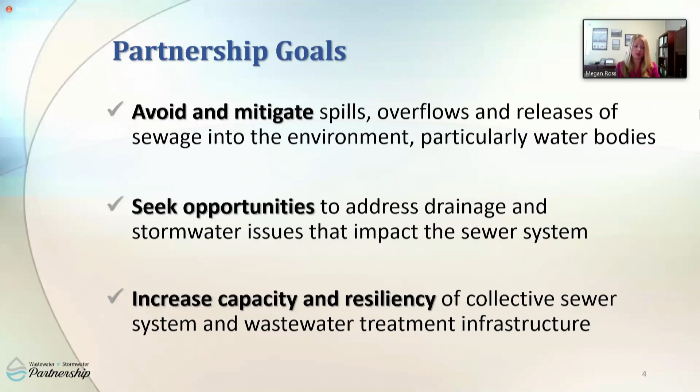To review, the Wastewater Stormwater Partnership identified and agreed upon 3 primary goals that needed to be addressed, as noted by Commissioner Justice: to avoid and mitigate spills, overflows, and releases of sewage into the environment, particularly ones that affect water bodies, to seek opportunities to address drainage and stormwater issues that have an impact on the sewer system, and to increase capacity and resiliency of the collective sewer system and wastewater treatment infrastructure.

Pinellas County is home to 24 different municipalities which serve hundreds of thousands of residents and millions of visitors every year. 17 of those municipalities own or operate wastewater and stormwater systems. Additionally, there are 13 wastewater treatment facilities. These municipalities make up our wastewater stormwater partnership. The purpose of this partnership is to coordinate and collaborate on ways which we can reduce sanitary sewer overflow events.

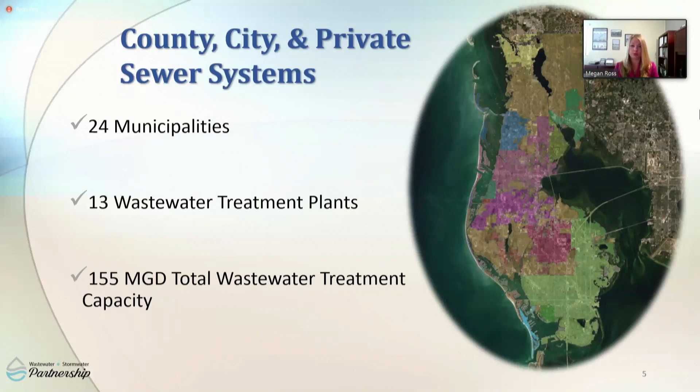As you all know, this has been an eventful and challenging year so far. Throughout the COVID-19 pandemic, our wastewater and stormwater professionals have continued to deliver critical services to our communities under modified protocols. I can assure you that although the current pandemic has provided for operational challenges, it has only served to further our commitment to this community. Our role has never been clearer. We are critical infrastructure essential workers, and water resources provide for the quality of life that we rely upon.

Throughout the past several months, our teams have been breaking ground on new projects. Now more than ever, we need to focus on water and wastewater infrastructure as it is vital to protecting public health. Water resources are integral to so many facets of our everyday lives. Behind the scenes of the beautiful beaches, waterways, hospitals, and emergency services that comprise this wonderful county lies a plethora of infrastructure that supports and maintains the vibrance of our region. As water resource professionals, supporting this infrastructure is our job and our mission.

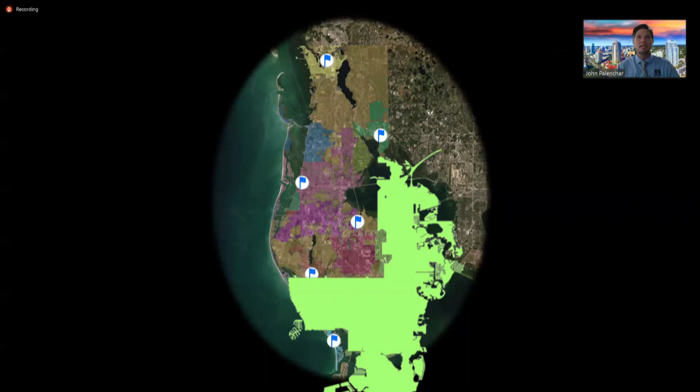So the private lateral is the portion of the pipe that connects a structure's plumbing to the sanitary sewer system, the publicly owned portion. It's commonly known that stormwater and groundwater getting into the sanitary sewer causes a burden on the sewer system and our wastewater treatment plants.

Abnormally extreme inflow and infiltration can result in sewer system overflows or inadequate treatment at the plants, resulting in releases of raw or partially treated wastewater into the environment. However, even during manageable events, this inflow and infiltration places an increased burden on utilities. It makes operating the system more challenging and increases the operations and maintenance costs.

Imagine having to buy and maintain a car that you drive every day to work, but a couple days out of the year, it has to drive the Firestone Grand Prix of St. Petersburg. However, the race is unscheduled, the course is different every race, and by the way, there's a viral pandemic occurring. That would be an expensive car, and it would require a lot of maintenance every day so that it could be ready to race at the drop of a hat. So, as you can see, reducing that I&I has a potential for wide-ranging benefits.

If we look at a Water Environment Research Foundation study, a reported range of private sector inflow and infiltration contributions range from 7% to 80% with an average of 40%. This is based on a survey of 26 utilities across the United States. 7 to 80%, that's quite a range.

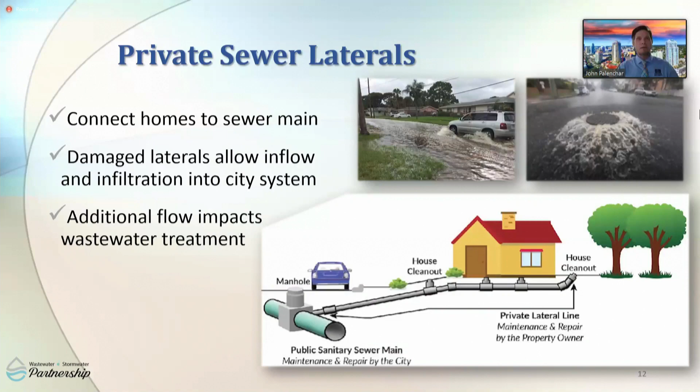The private lateral replacement pilot project is estimated to cost approximately $1.2 million and is partially funded out of a pollution prevention project that the city has with the Department of Environmental Protection in lieu of consent order penalties.

Two of the study areas were selected where previous flow monitoring had indicated substantial I&I. These two study areas also contain a housing stock built between the late 1950s and early 1970s, which corresponds to a period when Orangeburg pipe was being used as a material for lateral pipes. Orangeburg pipe laterals are generally considered a likely source of I&I.

Flow monitoring of the study area began last year prior to the rainy season, and it will conclude when sufficient data is gathered following the completion of the lateral rehabilitation and replacements.

The study is broken up into two groups, a control group and a study group. This will help ensure that the resulting data provided by the pilot will be reliable. The original goal of the pilot was to inspect 300 homes and rehabilitate a maximum of 150 laterals by the end of August 2020. Between February and June of this year, there were 71 inspections conducted and 39 laterals have been rehabilitated. So, we're well on our way, but we have a long way to go and we need to get the word out. It would be great if you share this information with anyone you may know in these study areas, because the more participation we have, the better results we'll provide to the partnership.

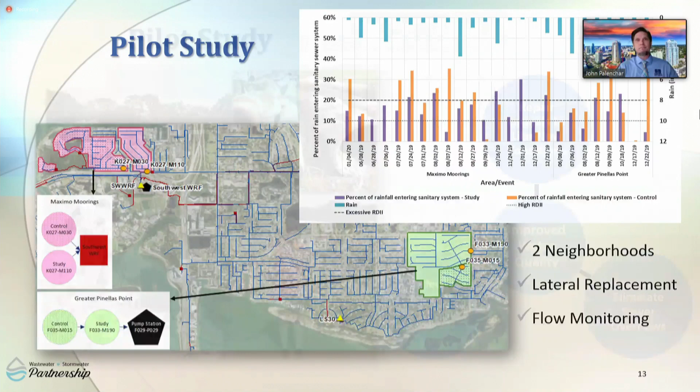The pilot project provides $800 for homeowners to have their private plumber inspect the lateral. If the lateral is found defective by the plumber and confirmed by St. Petersburg's review of the inspection documentation, the homeowner can be reimbursed up to $8,000 for the rehabilitation. This reimbursement can go straight to the plumber so there are no out-of-pocket expenses for the homeowner. By far, each customer's favorite part of the program is the minimal or no out-of-pocket expenses. Once those rehabilitations are completed, the percentage of I&I that was eliminated can be calculated and a system benefit determined. This information can then be used to determine the level of investment appropriate for private lateral replacement of similar housing stock here in Pinellas County. That brings this project full circle, from inception at the partnership to funding through relationships built in the partnership, to delivering actionable information back to the partnership, not to mention helping some residents improve their plumbing along the way.

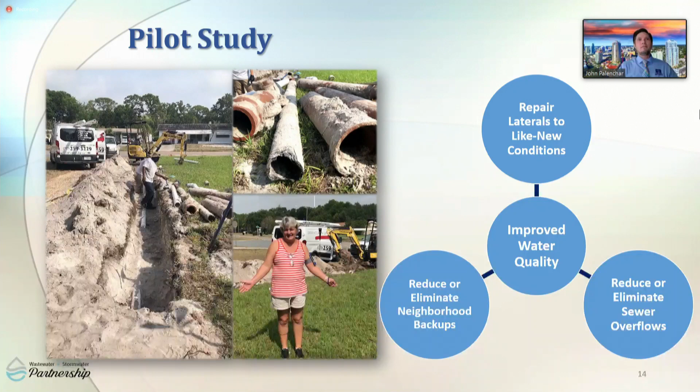Thank you, John, and good morning, everyone. For those of you who don't know me, my name is Thomas Kiger, and I'm the Wastewater Division Manager here at the City of Tarpon Springs. Today, we are going to be talking about our lift station maintenance program and some of the actions we've taken as a smaller utility to address sewer overflows.

Looking back, 2016 was a challenging year for the city from a wastewater perspective. We had 25 sanitary sewer overflows, a record high for us, and many of these were associated with Hurricane Hermine. After this event, the city joined this partnership as an opportunity to collaborate with nearby utilities to solve our wastewater challenges. One action that came out of this partnership was a renewed focus on our wastewater lift stations and our repair and replacement program.

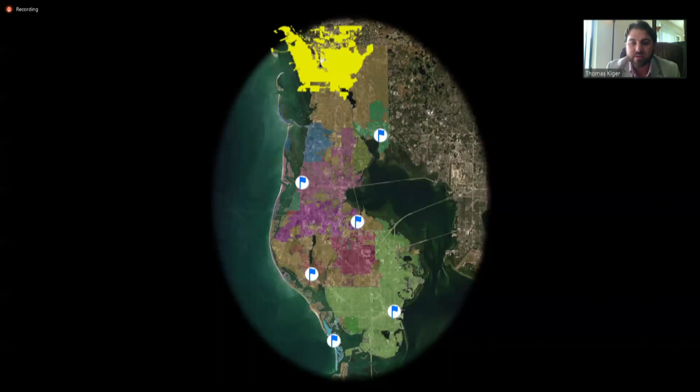Here in the city of Tarpon Springs, we're a coastal community. Everyone knows the city for its sponge diving history and as a unique Greek American cultural center. Tarpon is one of the few places in America where you might be greeted with a friendly 'kalimera' rather than a standard good morning. The sponge docks on the Anclote River are really at the heart of the city. Our water resources are a critical part of this cultural heritage, and protecting them is critical to maintaining the ongoing history of the city and our local tourist economy. Here in utilities, maintaining our wastewater collection system is the first step in protecting our local environment and our local businesses.

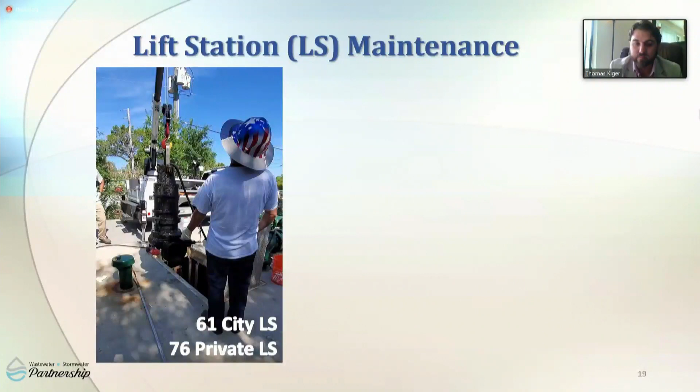Here in the city of Tarpon Springs, we operate a wastewater utility that serves over 20,000 people and is made up of 149 miles of sewer main, over 2,200 manholes, and 61 city-owned lift stations. These lift stations are the first line of defense to prevent sanitary sewer overflows. Back in 2016, nearly half of our sewer overflows during Hurricane Hermine were at our city lift stations. Since then, after collaborating with this partnership, we renewed our focus on the lift station maintenance program.

We increased the frequency of inspections, dedicated new staff to the program, and created new SOPs for lift station inspections to improve performance. We now have 8 full-time staff in the lift station maintenance program, and we inspect every lift station in the city every 2 weeks. This means our staff does roughly 1,500 inspections per year, or roughly 180 inspections per staff member. Our total operation and maintenance budget for the wastewater division is $3.9 million, and nearly $600,000 of this is budgeted for utilities maintenance, which largely consists of our lift station maintenance program.

We've recently invested in additional SCADA integration for our lift stations, allowing for remote operation and monitoring and improved response times if there's a problem. All of these efforts have combined to allow us to ensure that our wastewater system can convey wastewater to our treatment facility safely and effectively.

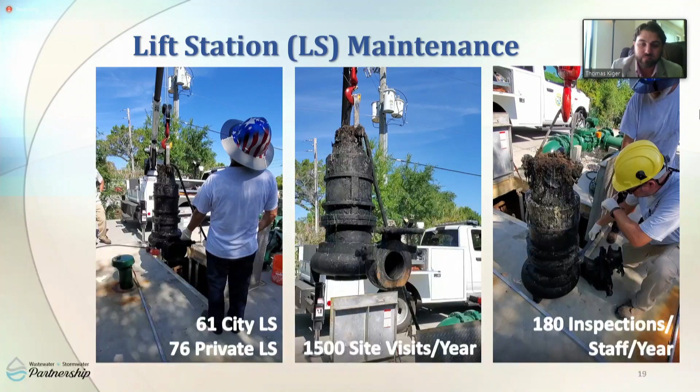Once at our wastewater treatment facility, we provide advanced treatment. There are also 76 privately owned lift stations throughout the city, owned by local businesses, apartment complexes, and other private entities.

To ensure that these lift stations are maintained in proper working condition, they are monitored through the city's environmental management program by the city's environmental inspector, who does quarterly inspections of all private lift stations and provides technical assistance to private owners to help ensure proper operations.

We've also recently added important information on these private lift stations, including emergency contact information, to our GIS system. This allows us to respond quickly and effectively in the event of an emergency at a privately owned lift station.

Overall, the most important part of our program is getting results. Back in 2016, we had 25 sewer overflows throughout the city, and since then we've dropped that number to only 14 overflows in 2017. This year, we've only had 1 reported sewer overflow to date, knock on wood.

A lot of this improvement is due to our lift station maintenance program. In 2019, we only had 3 sewer overflows at our lift stations, and in 2020 we have not had a single lift station overflow reported to date.

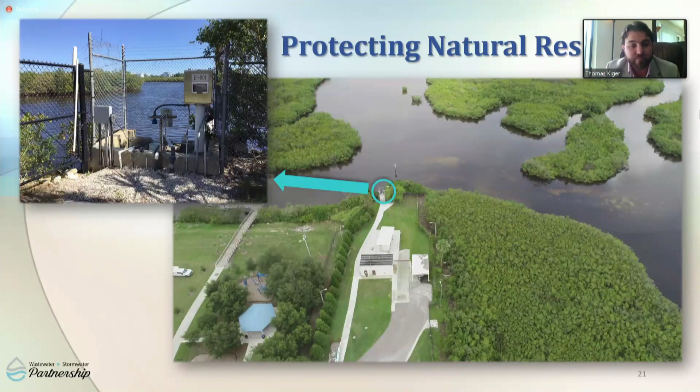I'm Nan Bennett, the Public Works Director for the City of Oldsmar, and I'm pleased to be here to discuss with you the City of Oldsmar's lift station maintenance program.

Oldsmar's lift station maintenance approach has many similarities to the Tarpon Springs program just highlighted, but also a number of differences that address the specific needs of Oldsmar. The task force elements covered by this program are rehabilitation and replacement, legislation, and resource sharing and maximization. Oldsmar's wastewater collection system includes 27 public lift stations that lift or push the sewage to the wastewater treatment facility.

Additionally, there are nearly twice as many privately owned lift stations that lift sewage from our customers' property into the city collection system. Oldsmar's approach to monitoring and maintaining lift stations is twofold, with programs to ensure that both the publicly owned and operated, as well as the private lift stations, are maintained.

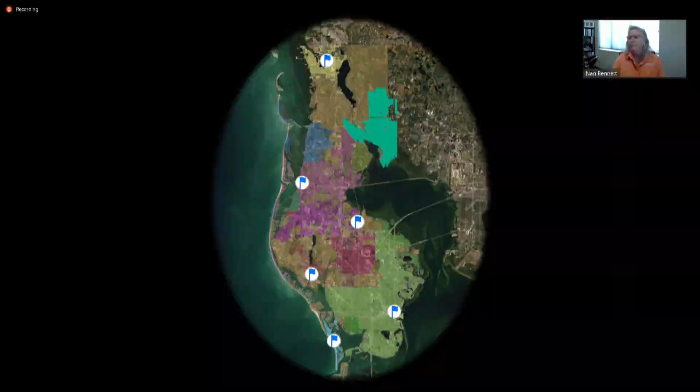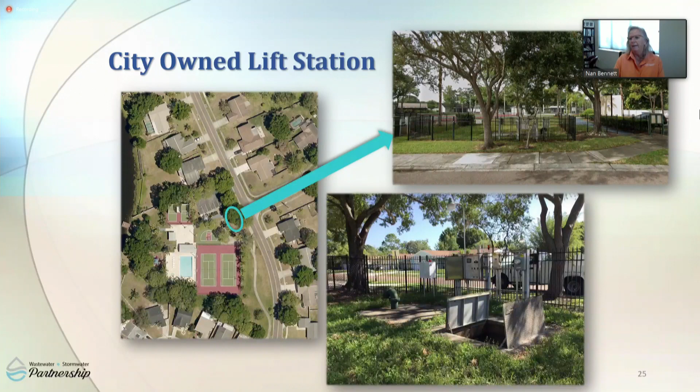The city has a robust monitoring and preventative maintenance program for city-owned stations to ensure that each station is continuously monitored by our supervisory controls and data acquisition, or SCADA, system located at our water reclamation facility. This system allows electronic monitoring of pump operations, wet well levels, and other indicators that notify staff if maintenance attention is required. Electronic reports of vital operating parameters on each station are also reviewed daily, and every station is visited and maintained at least weekly.

Each station is also equipped with a current transformer, or CT meter, to monitor amperage draw that will indicate additional loads, wear, or clogging before pump failure.

The City of Oldsmar hosts a large industrial base that discharges industrial wastewater to the collection system. Some of the lift stations that process industrial waste are also equipped with pH probes that act as an early warning alarm if changes in water chemistry occur that could negatively impact the biological processes at our treatment facility, so that the city has time to respond.

Between a routine maintenance schedule and early detection devices to protect our system, we've been able to minimize failures at our city lift stations. However, it was identified a few years back that some of the privately owned lift stations continued to fail and experience sanitary sewer overflows due to a lack of maintenance.

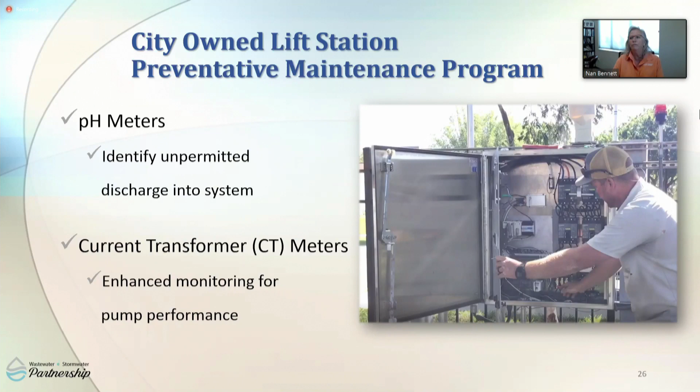To address this problem, Oldsmar initiated a private lift station inspection program about 3 years ago. In 2018, Oldsmar's sewer use ordinance was updated to include this program and an annual charge for the private lift station inspection service. The annual charge of $250 is split into 12 monthly payments and included in the utility bill. If necessary, there is a $50 reinspection fee for stations that do not pass initial inspection.

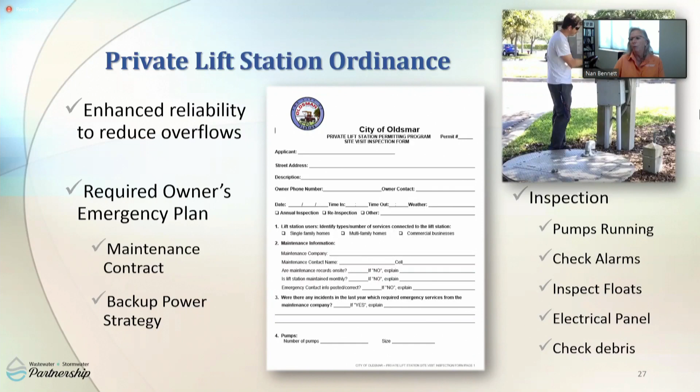Each year, utility staff coordinates an inspection with the private lift station owner or the person responsible for maintenance of that station. The condition of the station is assessed and documented and deficiencies identified. The inspection program requires that the facility have an emergency plan, backup power strategy, and a third-party maintenance contract to address maintenance and repairs. The operation of the station is inspected to verify that the pumps, floats, alarms, and electrical panels are working well, and to verify that the wet well is free of grease and debris.

Additionally, the contact information for each station is collected and maintained to provide quick access in the event of an emergency, such as an overflow. This program allows city staff to quickly notify lift station owners or maintenance staff when a private lift station experiences a problem or a sanitary sewer overflow is reported. During the time it takes for a response, the city will use their staff and equipment to control the discharge to the environment. This allows us to partner with our customers and protect the community.

This proactive program has provided value to the city, as there have only been 2 sanitary sewer overflows at private lift stations since the program's inception. Notification and response times from maintenance entities have improved from days and weeks to minutes and hours.

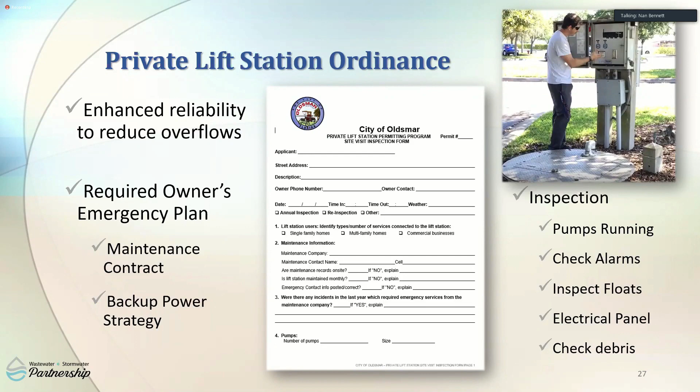This morning, I'll be presenting an overview of a unique project that we have undertaken to help us more aggressively and efficiently reduce the flow of inflow and infiltration-induced stormwater and groundwater into our wastewater collection system. The project is called our Wastewater Collection System Point Repair Program.

Our point repair program incorporates 4 of the elements identified as primary actions by the partnership. Those include infiltration and inflow analysis and studies, removal of hydraulic bottlenecks, resource sharing, and repair and replacement of defective system components. City of Clearwater, being a founding member of the partnership, fully supports all the stated goals of the partnership and participates in all of its initiatives.

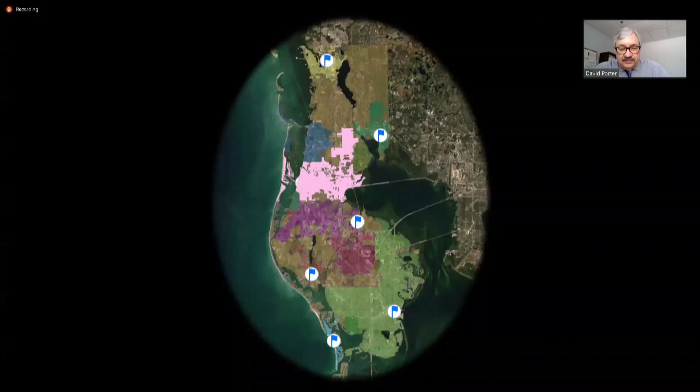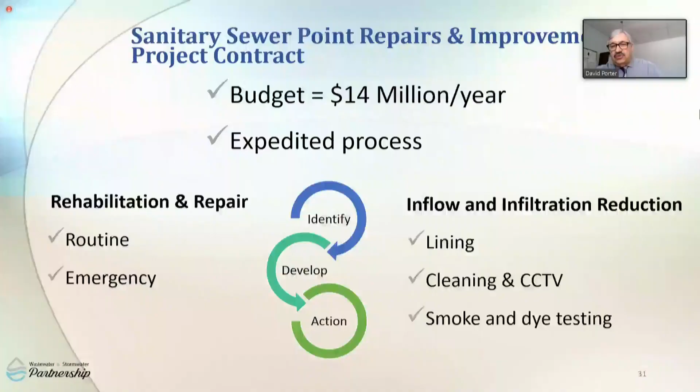Our utility provides wastewater collection, transport, treatment, and disposal services for over 110,000 residents who reside in the highlighted areas shown on the map. In addition, we also treat the wastewater generated by the City of Safety Harbor. Our system consists of approximately 350 miles of piping, 8,000 manholes, 78 lift stations, 3 water reclamation facilities, and 3 reclaimed water storage booster pumping stations. We collect, transport, treat, and dispose of approximately 14 million gallons of wastewater each day. The prevention of sanitary sewer overflows and the discharge of partially treated wastewater from our water reclamation facilities are 2 of the highest priorities we have.

To meet these priorities, we must reduce the entrance of excessive stormwater and groundwater into our collection system during stormwater events and when the groundwater table is high. Excessive stormwater and groundwater which enter the collection system is collectively known as inflow and infiltration, as you've heard earlier in this presentation. Traditionally, I&I reduction has required the implementation of a linearly sequenced multi-step plan to identify where the I&I was occurring.

Then hire an engineer to design a solution, then procure competitive contractor bids to do the work to implement the plan of the engineer, and finally to take the project to City Council for authorization to spend the funds needed.

Previously, we had to go through this sequential step-by-step process to correct each individual collection system defect. This process took a considerable amount of time. It did not afford an opportunity to reduce costs by leveraging the volume of work we did each year. It also limited the total number of defects that could be addressed each year.

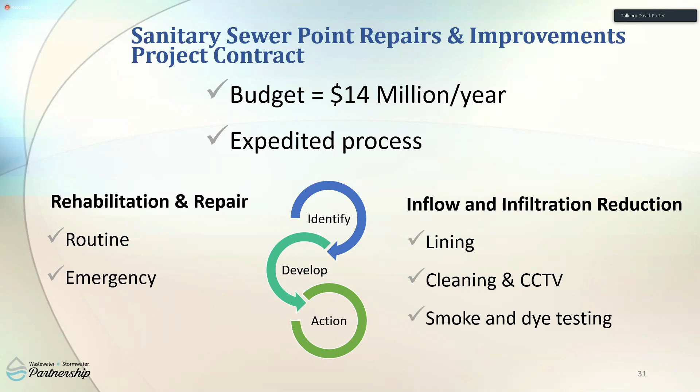An example of one of the sub-projects we completed during this first year of the program was the replacement of a large manhole located in the middle of the road at the intersection of Hercules Avenue and Range Road. This is a major roadway used by thousands of travelers each day. This area is largely light industrial, so large tractor trailers frequently travel this section of roadway as well.

This sub-project started on a Friday morning when we learned that a roadway depression had formed in the general vicinity of one of our manholes. The presence of a roadway depression can be a very serious matter, so we needed to quickly determine if the cause of the subsidence was related to a pipeline or manhole defect, or some other issue, so it could be resolved as fast as possible.

Because we had contracts in place to address this type of situation, we were able to have our contractor on site and conducting the necessary investigative work within 2 hours. By the end of the day, the contractor had excavated the area around the manhole and determined that the manhole and its connecting piping had defects.

They were able to immediately set up temporary wastewater pumping to prevent a spill, place the proper traffic control devices and detours in place, order the necessary repair components, and begin removing the damaged infrastructure.

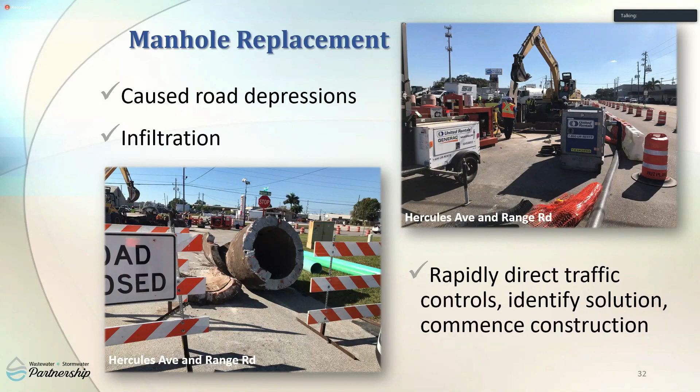Another example project completed utilizing this program is the rehabilitation of a large number of existing manholes. Utilizing permanent and temporary flow metering, smoke testing, and video inspections, we determined that many of the manholes located in the Clearwater Beach neighborhoods were allowing groundwater to infiltrate or run through the walls of the manhole and through the bottoms of the manhole, called the benches.

These defects resulted in significant quantities of I&I-induced flow entering the wastewater collection system during storms. We directed a project contractor to clean and seal 169 of the 340 manholes in the affected area. This resulted in an estimated peak flow reduction of approximately 200,000 gallons each day being experienced in our wastewater pipelines, lift stations, and water reclamation facilities during a typical storm.

The second round of manhole sealing is scheduled to begin in fiscal 21. This level of effort could not have been completed using traditional methods. It would have taken at least 2 to 3 years longer.

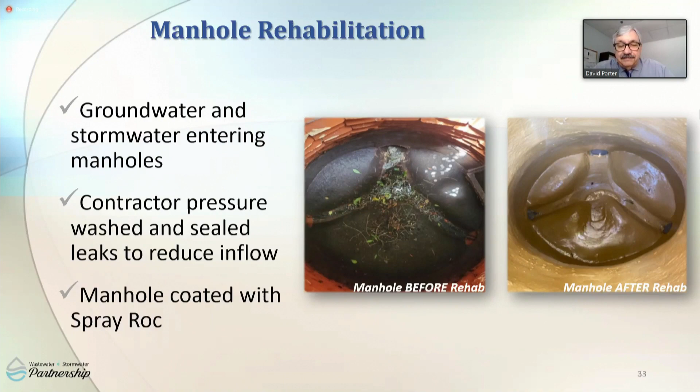Another example: sewer pipelines are constructed of many short pieces of pipe put together with bells and spigots known as joints. Each joint has a gasket designed to limit the amount of groundwater that can enter the sewer line. Unfortunately, over time, gaskets lose their effectiveness due to pipe movement and gasket material age. As piping ages, the amount of groundwater that can enter the pipe, especially during periods of high groundwater table, increases, which can cause wastewater flows to increase dramatically, putting stress on the sewer system itself, the lift stations, and the treatment plants.

These excessive flows can cause our sewers and lift stations to overflow, causing what's called an SSO, sanitary sewer overflow, or can cause our wastewater reclamation facilities to receive flows in excess of their design capacity, resulting in the release of what is termed partially treated wastewater, meaning the water received the majority of the treatment design but did not receive the final filtration step.

Utilizing our line cleaning, TV inspection, smoke testing, and flow monitoring project contracts, as soon as an I&I issue is detected, this allows us to more rapidly make repairs, such as installing a lining in a section of pipe that was found to be defective.

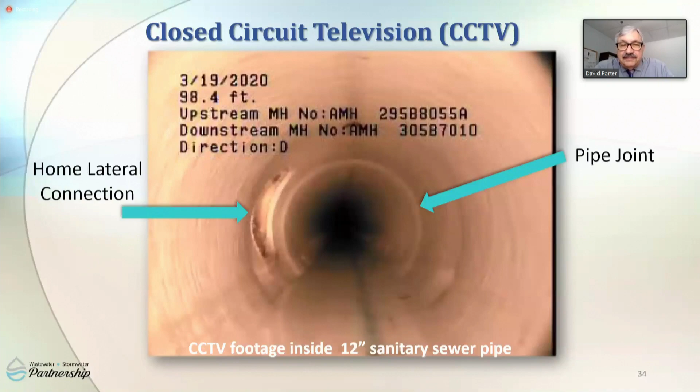Manhole pans are installed in all citywide manholes. These manhole pans prevent stormwater from entering our sewer system at manhole covers. Given that we have over 8,000 manholes system-wide, and that we estimate each pan can prevent up to 500 gallons per rain event, these pans can reduce the inflow into the sewer system by as much as 4 million gallons per day during a peak flow event. This can greatly reduce the stress on our sewer system and treatment plants, and again, greatly reduce the risk of SSOs and partially treated releases of wastewater at our plants.

So we are currently installing approximately 500 pans each year and expect to increase the rate of installation over time.

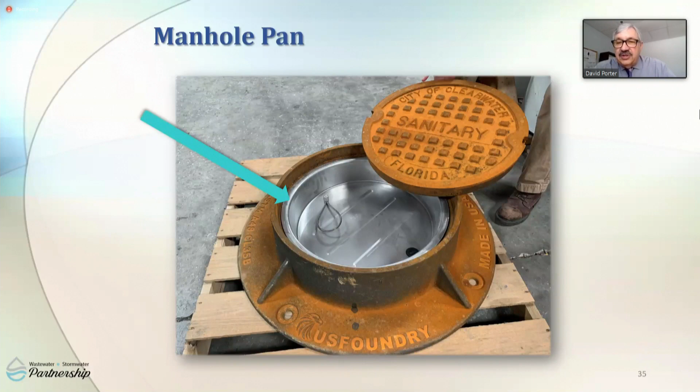Thank you, and good afternoon, virtual St. Pete Beach. I'm Mike Clarke, and I have the privilege of serving as the city's Public Works Director, and we are excited to be part of this partnership. Today we will be reviewing our new sanitary sewer force main pipe installation project.

This project will reduce system hydraulic bottlenecks in the existing gravity main by providing for expanded sewer flow capacity. There have been 2 public meetings, with more scheduled as we get closer to our shovel-in-the-ground construction start date this October.

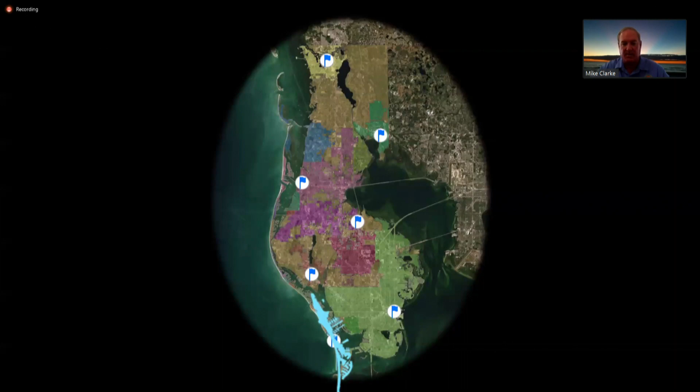In 2016, the city commissioned a sanitary sewer system capacity study as part of a review to determine the cause of continuing sanitary sewer overflows during and after storm events. The study determined that the sanitary pipe system surcharges in several locations, and the root cause of the surcharging are system bottlenecks and limitations of the capacity of the pipe conveyance system. Put simply, the system does not have sufficient capacity for the current and future flow conditions.

Following this study, the City Commission imposed a moratorium on new connections until the system has sufficient capacity to handle the existing and projected increases in flows. This project is the recommendation of the study. It is designed to alleviate the surcharging of the system and provide capacity for future development.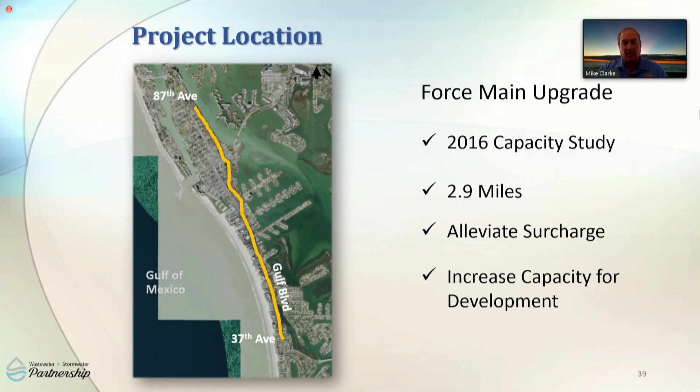The design team consisted of Kimley-Horn, Stantec, and George F. Young. A construction contract for $16.5 million was awarded to Metro Equipment Services in January of this year, with scheduled completion in December of 2021.

This project starts in the south half of the island at 37th Avenue, where pump station number 3's force main discharges into the existing 20-inch gravity main underneath Gulf Boulevard. The new force main will extend the existing one, and using a combination of directional drill and open trench, it will go north, generally under the southbound inside lane, up to Gulf Winds Drive.

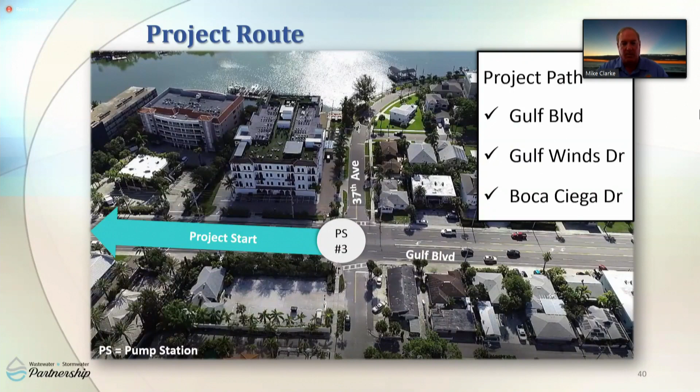The sanitary flows from the condominiums and hotel buildings on the west side of Gulf Boulevard are collected by 4 lateral collection pipes that parallel Gulf Boulevard under the west sidewalk. They currently discharge through a gravity lateral connection into the existing main line.

The 4 lateral locations will be replaced by new lift stations that will connect to the new force main. As you can see, the first one's at 44th Avenue, then 50th, 55th, and 58th Avenue at the northern end of the project. Following Gulf Winds Drive north, we will drill underneath 75th Avenue, which is one of the 3 main entranceways to the city, and then continue north on Boca Ciega Drive up to 87th Avenue. At that point, the force main will discharge into the well at our master pump station number 1.

We've been planning and designing this project for 4 years, and we are very excited to finally begin construction this October. Thank you very much.

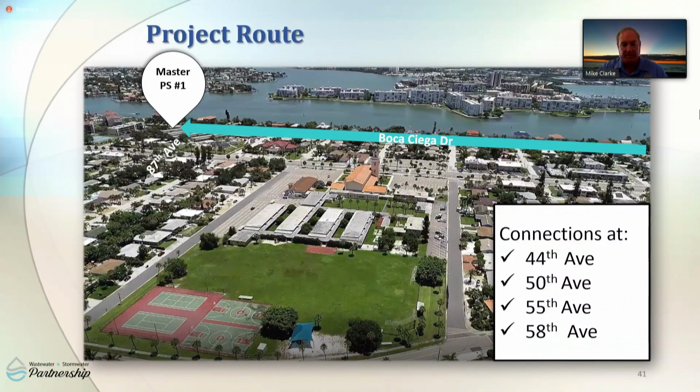Thank you, Mike, and good morning, everyone. I'm Shelby Beauchemin, Assistant Director of Environmental Services for Largo. I will be discussing the Influent Pump Station and Headworks project today.

This presentation focuses on 3 of the partnership's strategic goals, including inflow and infiltration, system hydraulic bottlenecks, and repair and rehabilitation.

The City of Largo is shown in purple on this map. The wastewater treatment plant is permitted for 18 million gallons per day of flow, and we see 12 million gallons per day on average. The treatment plant serves over 100,000 people in Largo and small portions of St. Petersburg, Clearwater, and Pinellas Park.

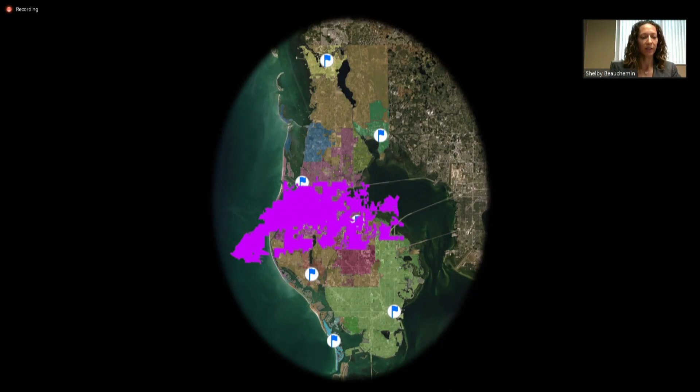The City of Largo was put under consent order in April of 2006 for sanitary sewer overflows, or SSOs. We were exceeding the capacity of the collection system, and wastewater was overflowing before it reached the treatment plant. The overflows prompted a consent order from the Department of Environmental Protection. As a result, the city set out to eliminate overflows to protect the health of our citizens and the environment.

We studied the capacity of the collection system and designed 2 projects to deal with the hydraulic bottlenecks and rehabilitation. Both projects went into service in 2017, one at the treatment plant and one at the collection system. The collection system wet weather force main is doing a great job getting flow to the wastewater treatment plant and reducing the number of overflows we have during the rainy season.

A force main is a pipe that our lift stations push wastewater through to get it to the plant. The project pushes wastewater from the collection system and pumps it to the treatment plant faster than before, creating a hydraulic bottleneck at the plant. We needed a way to deal with added flow at the wastewater treatment plant, and as a result, we completed the Flow Equalization Tank and Influent Pump Station project in 2017, and it has helped to improve treatment and reduce overflows at the plant.

We are continuously working to find inflow and infiltration to reduce the amount of flow in the collection system and the treatment plant. As a reminder, inflow is stormwater entering the wastewater pipe through a connection like a catch basin. Infiltration is groundwater entering the wastewater pipe through cracks and open joints. Inflow and infiltration studies identify these sources of water entering our wastewater system.

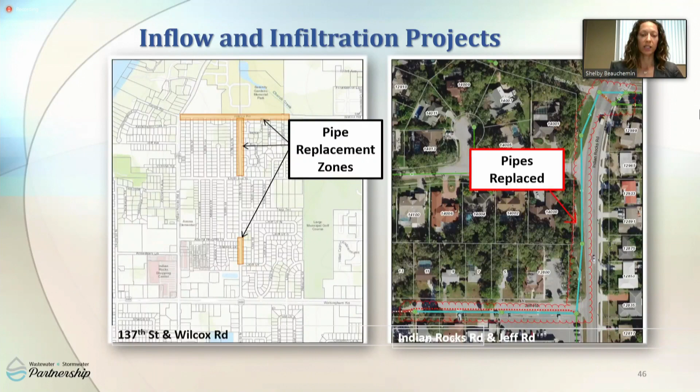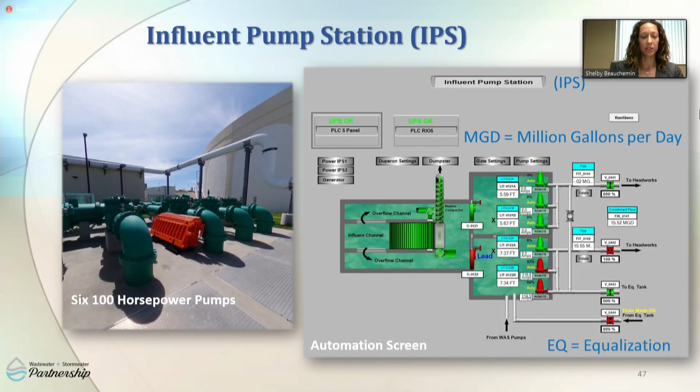Now that you know more about our collection system projects, let's talk about our treatment plant project. The Headworks and Influent Pump Station project helped relieve bottlenecks and overflows at the entrance to the treatment plant. The cost of the project was $25 million and included coarse and fine screens to remove debris, an influent pump station to pump flow into the treatment process, and the equalization tank to help with changing flows.

The treatment plant process works best when it treats a steady amount of flow throughout the day. If you think about your day, you wake up, take a shower, and create a lot of wastewater. Throughout your day, you use a minimal amount for flushing and cleaning. You may come home and do dishes and laundry and create a lot of wastewater again.

The job of the equalization tank is to store the extra flow during those peak times like morning and early evening, and release flow into the treatment plant at low flow times like the middle of the night. The equalization tank holds 5 million gallons. It was a $1.5 million line item in a $25 million project.

The tank is an important complementary project to the wet weather project in the collection system. If you recall, that project pumped flow to our treatment plant faster than before. In the influent pump station and headworks project, we didn't only add a tank, we revitalized the first steps of the treatment process, including the headworks.

The equalization tank allows us to pump 12 million gallons, our average flow, to the treatment process. As flow increases during a storm event, we dial in and increase flow at the plant, and the tank and the pump station work together to put a steady flow through our treatment process. The equalization tank also helps us with the current construction project, allowing us to stop flow for short periods of time to allow the contractor to complete their work.

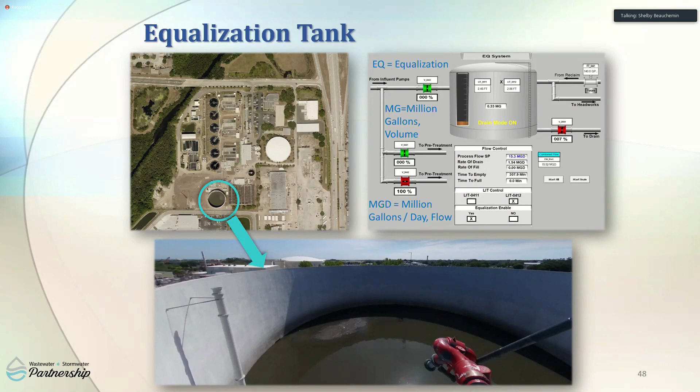The headworks portion of the project revitalized a very old system. This section of the plant takes out additional debris and sand that can harm our treatment plant equipment.

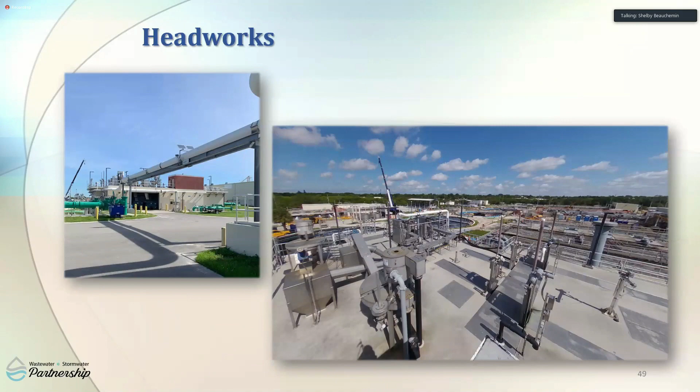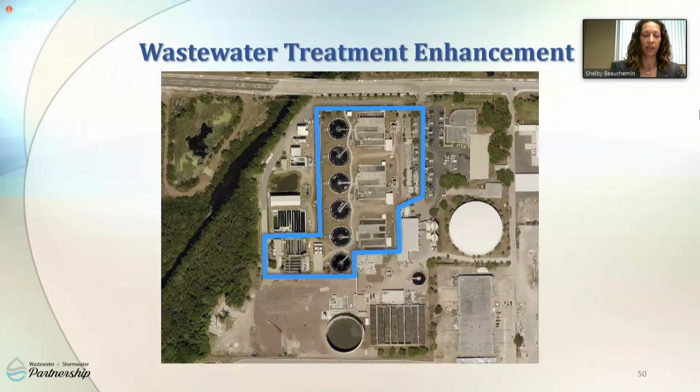These projects were all made possible because of the support from our commission, city management, and state revolving loan funds managed by the Department of Environmental Protection. When under consent, it becomes more important to keep lines of communication open with DEP. They have closely worked with us and updated the consent order to reflect our ongoing efforts. We are continuing to improve our plant and meet the consent order deadline of October 22nd of 2021.

Next up, I would like to introduce Paul Miselis, the Pinellas County Operations and Watershed Planning Section Manager.

Thank you, Shelby. Good morning, everyone. I'm Paul Miselis with the Pinellas County Public Works Department.

This is the stormwater element of the partnership. The key goal for the stormwater component is the reduction of inflows into the wastewater network. We do this by looking for opportunities where drainage improvement projects would also yield benefits to the stormwater collection, to the wastewater collection system. For example, if we reduce the depth and duration of flooding over manholes, or if we remove a pump station from a floodplain, we can potentially reduce the volume of inflow into the wastewater network.

I'll show you a specific example of how this concept can be applied to alleviate house flooding and to reduce flood depths over wastewater manholes. One of the areas I'll be talking about is located near Long Bayou, just south of Lake Seminole.

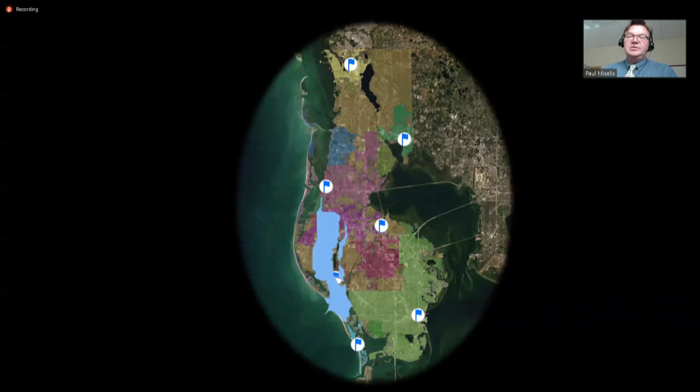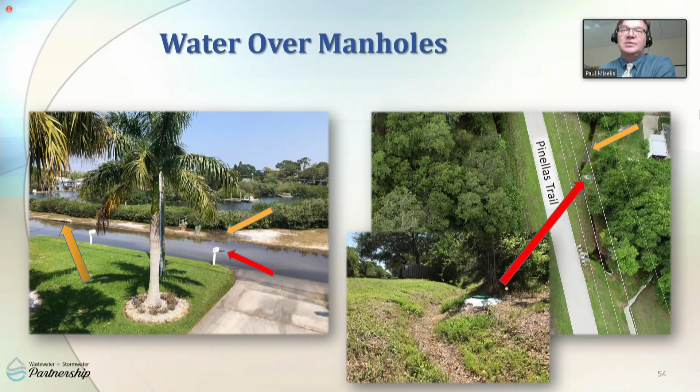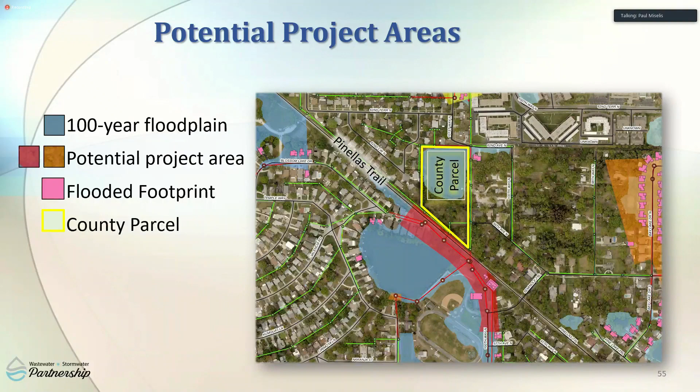The yellow outline in the middle of the image is a parcel owned by Pinellas County Utilities, and it has an existing pond on it. Public Works is working together with the Utilities Department to use this county-owned parcel and address both drainage improvement and reduction of flooding over the wastewater collection system in the area.

So here's the concept. We expand the existing pond on the county property to create additional flood storage. We divert water from the Pinellas Trail ditches to the expanded detention pond. We improve the conveyance capacity of the existing ditches running parallel to the trail. We throttle the pond outfall to the improved stormwater conveyance along the trail.

And finally, replumb the drainage along neighboring streets to connect with the stormwater conveyance along the trail. The ultimate discharge is to Long Bayou farther south. This plan would result in the removal of 8 homes from the 100-year floodplain and reduces flooding over 38 wastewater manholes. The project construction cost estimate for a project like this is around $2.5 million.

We are currently working with a consultant to identify and refine similar stormwater improvement projects with direct inflow reduction benefits. Also, the potential for inflow reductions are reviewed when new stormwater CIP projects are being developed.

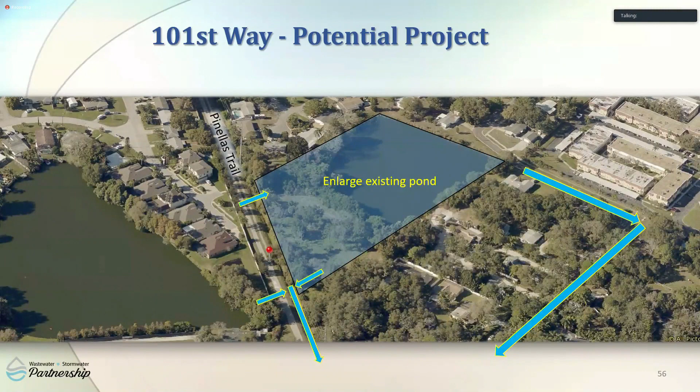So up next is Megan Ross with Pinellas County Utilities on interlocal agreements.

Thank you, Paul. Moving forward, the Wastewater Stormwater Partnership is currently developing an interlocal agreement that allows us to interchangeably lease vehicles, equipment, and resources with each other to maximize efficiencies. This agreement falls under the resource sharing and maximization component of our action plan, in that it allows shared access across municipal boundaries to needed equipment and support for our collective wastewater and stormwater assets.

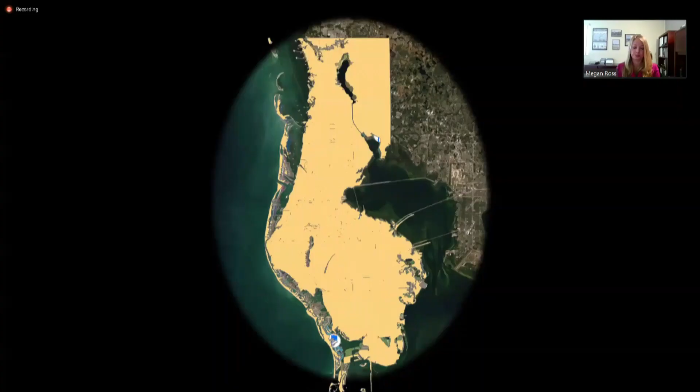This program is one that will be shared countywide among all of our partners who wish to participate. This includes spanning across all 24 municipalities, as seen here, that can benefit from this agreement.

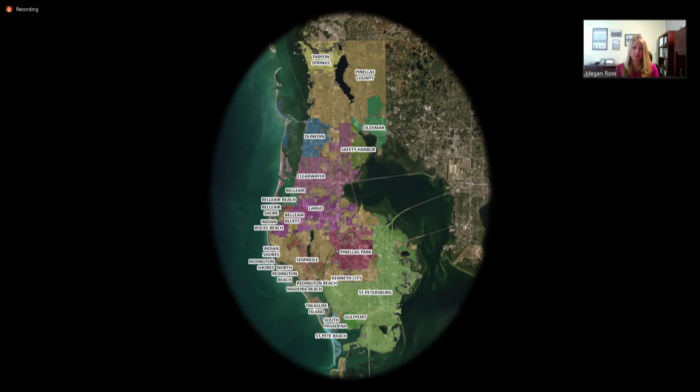The resources pertaining to this agreement are those that are needed for wastewater and stormwater condition assessments, which can be a significant capital investment for a utility. One example of a proposed shared resource are Vactor and closed circuit TV trucks. Vactor trucks are used in conjunction with a TV truck to clean the pipe and remove any existing debris in order to get a clear visual inspection of the pipeline deficiencies.

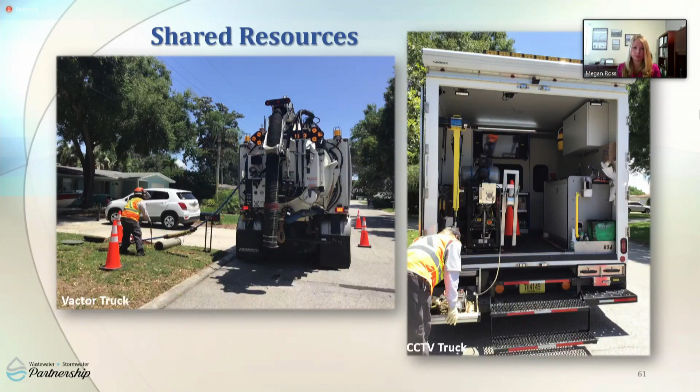As seen here, a closed circuit TV truck is used to visually assess the condition of underground sewer pipes with a closed circuit camera. The combined total investment of these trucks can be upwards of several hundred thousand dollars.

Additionally, maintenance, parts, and staff needed to operate the vehicles can further this expense. For larger utilities, the return on investment is typically worth the expenditure. However, it can be a significant expense for smaller utilities.

TV trucks are advanced pieces of operating equipment, fitted with software and technologies much like that of a computer. The equipment is necessary to maintain and assess the condition of subsurface wastewater collection assets to identify where repairs are needed. The data is evaluated and scored, reviewed by engineering professionals, and pipes are then prioritized to be repaired, replaced, or lined.

Throughout implementation of this interlocal agreement, smaller utilities can lease this equipment at an hourly or daily rate, and therefore allow them to make a more economical decision when it comes to assessing options for condition assessment of assets. We hope to gain a more efficient and effective outcome for all as a result of these shared resources.

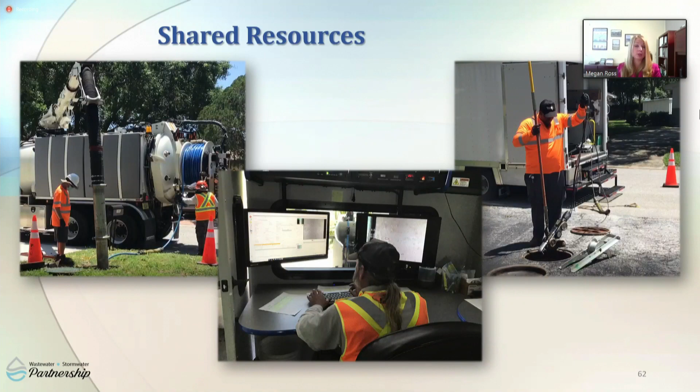On behalf of the Partnership Technical Working Group, I want to close by saying that we are all committed to investing in wastewater and stormwater infrastructure to protect public health and the environment. Special thanks to all our steering committee officials who made this a priority and formed this important partnership. Under your leadership, we will continue to make progress towards our strategic action plan initiatives, furthering the partnership's goals of avoiding and mitigating spills, addressing drainage and stormwater issues, and increasing capacity and resiliency of collective wastewater systems. With that, I'll turn it over to Commissioner Justice for closing remarks.

Stay tuned, as immediately after this we will have our Q&A session.

Thank you, Megan, and thank you to all our presenters today. We've seen some outstanding presentations, and I want to thank those that came today, and our municipality partners, whether presenting or providing information. We've been doing this for a few years, but it's still a lot of good education on the basics, and learning about what everyone is working on helps us all move forward. Thank you to everyone who's been involved. This is what the goal was when we started: to increase communication and increase the partnerships. With that, Megan, I'll turn it back to you for questions and answers.